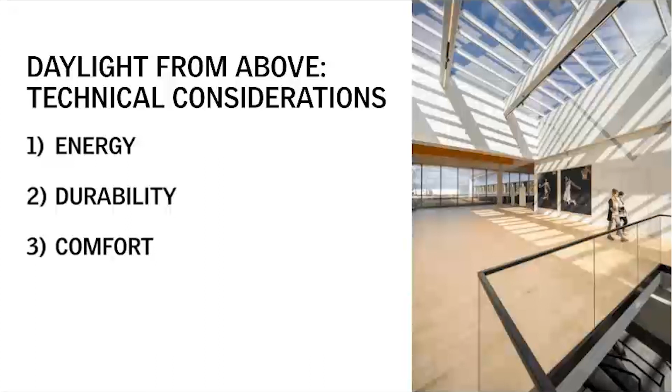We took that into the discussion, and then we talked about durability and really the structure, the building code part of things, but also some of the building science around water infiltration, condensation, and things like that. I've got slides to support that.

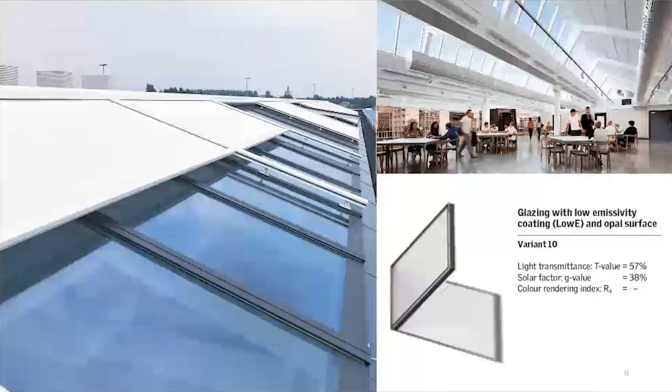And then the third part of the presentation was about comfort. In this part of the conversation, we talked about glare, thermal comfort, and acoustics, and some elements around Active House, which we're going to expand on a little more today. Active House is a European high performance building standard that Velux has been involved with internationally.

So we really took a closer look at that. At that time, before I went into the comfort section, I asked everybody to take their energy blinders off.

I think with energy code or building code so focused on energy, sometimes we forget there are other trade-offs when we look at energy efficiency as a standalone. So that was the idea: take the blinders off and try to get that bigger picture around designing with skylights.

And if that's hard for anybody, it's going to be hard for me, because my background is energy. The first 8 or 9 years of my career focused on energy and high performance buildings. So that was the element we were asking people to consider.

This presentation is available on YouTube. There's a link for it on the RAIC corporate page. If you scroll down far enough, there's a spot where you can look at past presentations.

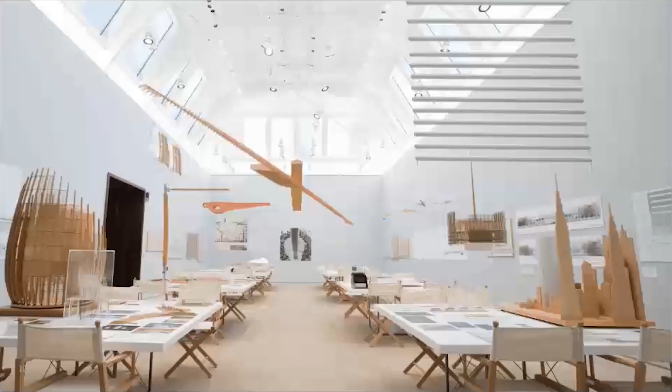Renzo Piano, another really famous architect who loved using daylight in his design, really understood the importance of daylight, and understands that light is probably the most essential material for architecture. It is the least touchable, but probably the most important.

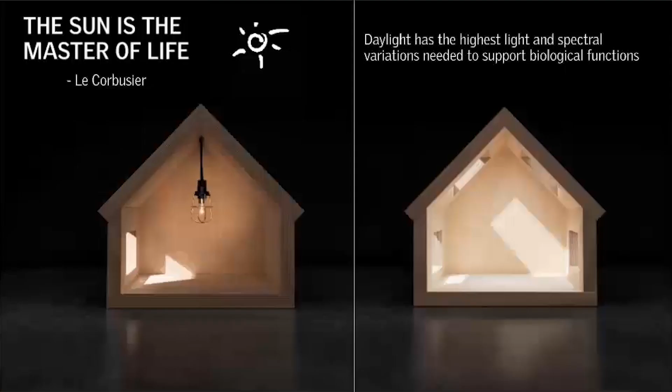It really is certain that our bodies and minds need the sun. Humankind has always had an innate connection to the sun and has relied on its resources for health and flourishing. The sun is the central entity for sustenance on a biological and emotional level.

Light from the sun is fundamentally unique in that it has the highest light and spectral variations needed to support biological functions. Artificial light is simply not a good enough substitute for daylight.

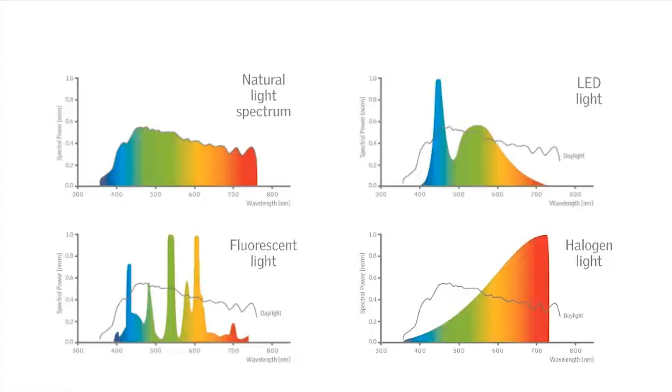Shown here is the intensity of light by wavelength for natural light compared to typical artificial light sources. You see that no artificial light sources are able to mimic daylight's variations in the light spectrum. Also note that only 40% of daylight is visible radiation, while the remaining is infrared and ultraviolet wavelengths.

We need the sun for more than just seeing. The sun's radiation affects our bodies, our minds, our emotional health, and our behavior. The sun's nutrients influence countless factors of human physiology and behavior, which are governed by the circadian rhythm.

That's our 24-hour biological clock. We're genetically bound to these natural rhythms of daylight to guide our body and cellular growth, the secretion of hormones. We need the variations to stimulate the body's biological master clock on a cellular level even. It promotes the processing of proteins.

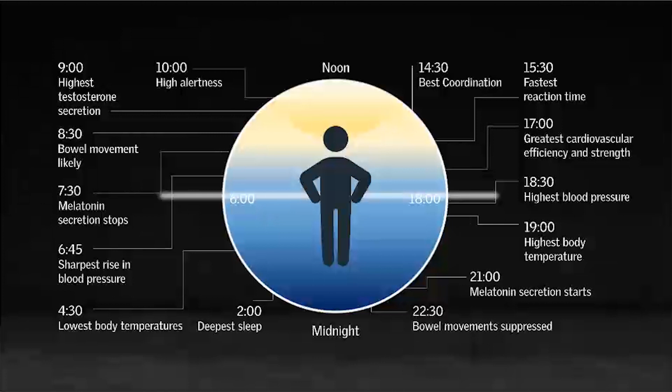The non-visual input of daylight is also needed to synthesize vitamin D into calcium. Even more, it regulates melatonin, which is related to sleep, and cortisol, which is related to stress. So I threw out a whole bunch of things that the sun does, and this really shows that ultimately daylight makes sure that our bodies are well maintained and balanced from day to day.

There have been several studies that have found daylight to improve many things, such as learning and information retention in children. You see that it helps with patient relief and recovery, and you can even see that it helps with productivity in workplaces.

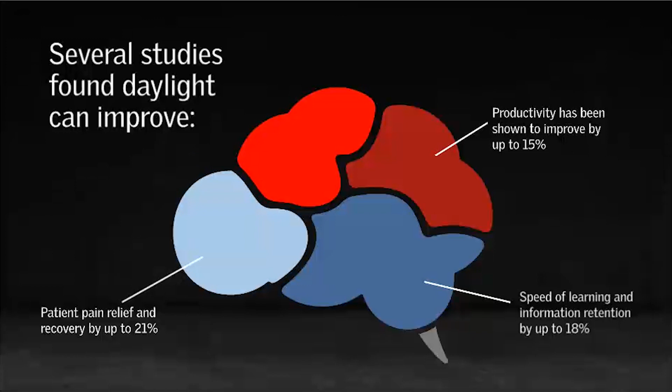So you really are starting to understand that daylight is one of the greatest tools that an architect has when it comes to improving the lives of people and their health and well-being. And there are even more general studies that have shown connections between daylight levels and improvements in children's learning and test scores.

There are higher scores in math and reading, fewer sick and absent days from school compared to those in inadequately daylit classes. There's better concentration, improved vision, better memory retention. Working in classrooms without daylight really does disrupt the basic hormone patterns that help us function well.

We also see the importance in healthcare settings. After food, lighting is the most important environmental input in controlling bodily function. It really affects the body on a hormonal and metabolic rate.

There have been even more studies that have shown that lack of daylight is a major contributor to the shortage of experienced nurses, as insufficient daylight increases their stress. But introducing nurses and doctors to at least 3 hours of daylight per day actually reduces their stress and increases their satisfaction at work.

You see that there's also less medical errors found, and there's just an overall positive influence on health and well-being due to increased visibility, improvement to the circadian rhythm, and psychological effects such as the alleviation of seasonal depression.

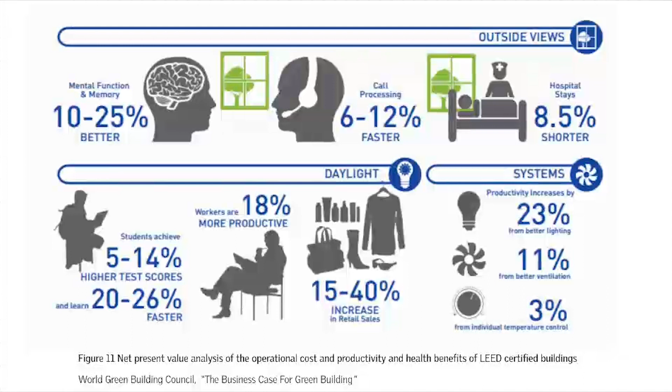The World Green Building Council summarized even more of the benefits here. So if we know that daylight has all of these benefits, how do we get more of it into our buildings? That's really what we touched on in that first presentation.

We're starting to see beyond the strategies and the importance of daylight. Daylight is super unique because daylight is never normal. You have variations in lighting. The daylight will move and change as the sun moves across the sky. There will be changes throughout the day, the month, the year, changes in the intensity, location, and color of the light. Sky conditions and clouds moving will disperse daylight differently and cause it to change. It really enhances psychological comfort, and humans are really drawn naturally to daylight.

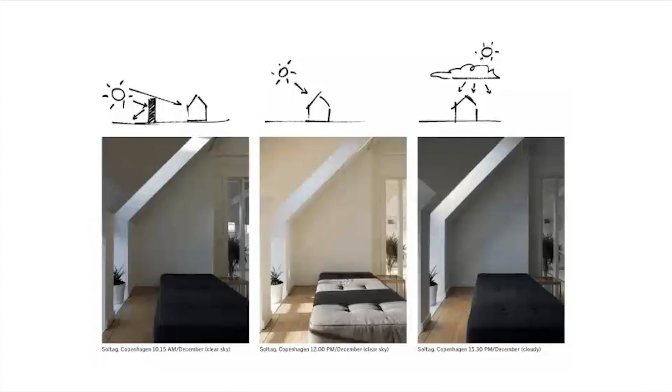We learned that daylight is most powerful from above, that roof windows and skylights have shown to provide up to 2 to 3 times more daylight than facade windows. I mentioned that rule of thumb that we really like to use: the more sky you see, the more daylight you get.

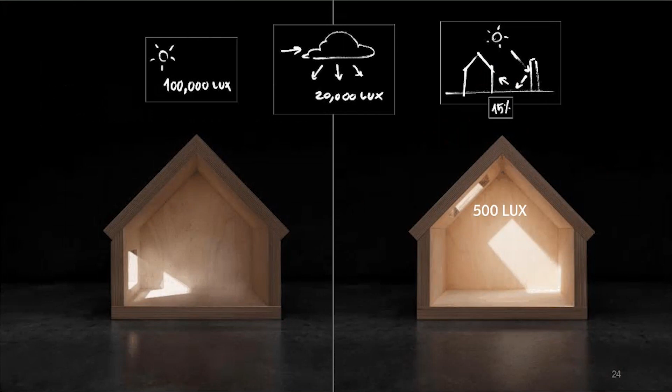We have to remember, the sun is an extremely dynamic light source, so you have this diversity of daylight. You can have direct daylight, indirect, or reflected.

We touched on how there are many factors that affect daylight coming into a building: your sky conditions, your location, your surroundings, if there's any obstruction, orientation, all of these things. And the question that this raises is, how are you going to design your spaces to overcome these challenges now, in light of understanding the importance of daylight for people?

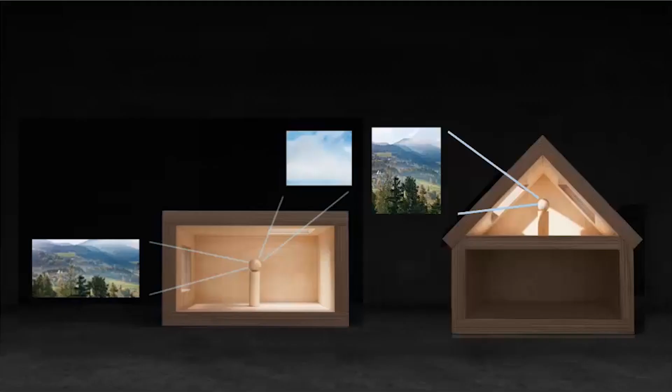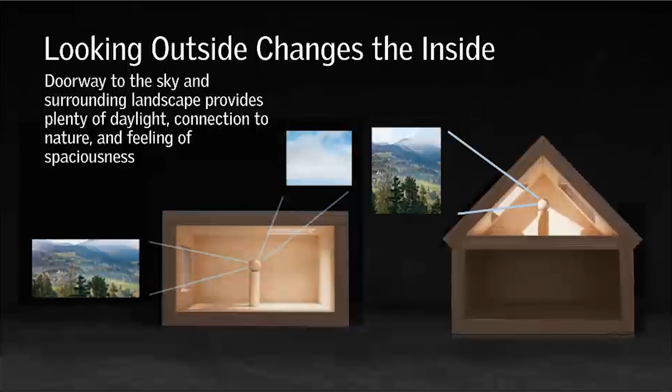There's also this element of view and surroundings, and sometimes it really is about what our eyes are seeing as well. Looking outside really does change the inside. You have this doorway to the sky and the surrounding landscape, and it's going to provide you this abundance of daylight. It's going to give you this connection to nature and this feeling of spaciousness. Even the idea of biophilic design is now coming into play, understanding that innate connection we have with the outdoors. Your exterior views can absolutely transform the essence and expression of the interior of your space.

You have, again, this doorway to the sky. It's going to provide you views to outside, and having both views to the surrounding landscape and the sky is really important. Both are really necessary for psychological and visual comfort. You're having a view with layers—layers of sky, city, landscape, and the ground. You're having this visual variation.

That's really going to help expand that visual experience. It's going to make the space feel bigger and brighter. You're going to experience less eye fatigue because the light is going to be more balanced when coming from multiple sources. Ultimately, you're going to enjoy the space more.

Now, another important part of the conversation of healthy buildings is indoor air quality and natural ventilation. But why is it so important?

Indoor air has been shown to be up to 5 times more polluted than outdoor air. We've become a society that spends 90% of our time indoors. Buildings are more airtight than they've ever been, which is good—it's good at keeping things in, so it's a blessing. You have energy savings, you're keeping heat inside your building, but it can also be a curse in the sense that now we're trapped with all of this pollutant and harmful air within our buildings.

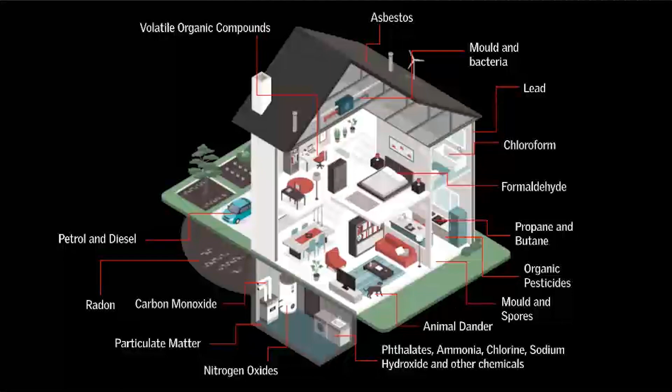This slide was actually taken from a presentation from Sandra Tedesco, who presented at the Active House Symposium. I know that we had mentioned that in one of our earlier presentations that we hosted last September. And these stats really struck me. And who would have thought that burning one scented candle in a home is roughly equivalent to moving every major industrial point source and coal-fired power plant in Texas within 50 miles of your home?

Like, you read that, and the weight of responsibility as an architect, I think, really comes more into play. We understand now that indoor air quality is extremely important when designing spaces that people will essentially spend most of their lives in. So how is health and well-being going to be the driver of our buildings? At Velux, we believe that both daylight and fresh air are key elements to healthy buildings.

And one consideration is the Active House standard. And if you are not familiar with Active House, it looks at 3 main thresholds: comfort, energy, and environment, with a real focus on occupant comfort. So some of the programs and standards that you are familiar with around built energy, some of them may miss this element of comfort. But with Active House, comfort is the primary design driver.

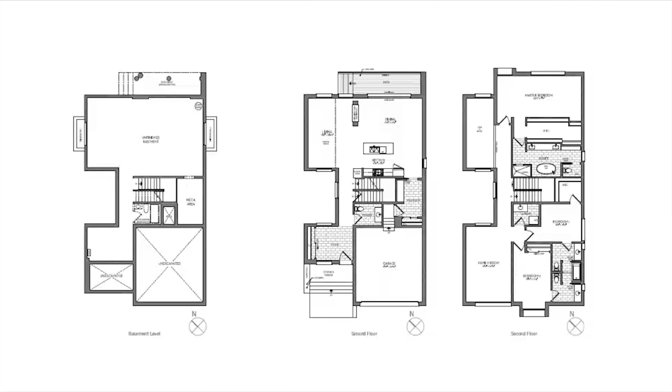Daylight analysis was done on the house. So in the bedrooms and the transportation corridors and spaces like the living room and the dining room, modeling was done. And then on an overcast day, I ran around with my lux meter and took measurements, and ran outside and took measurements, and I was able to validate this model to show that it does have very good daylighting.

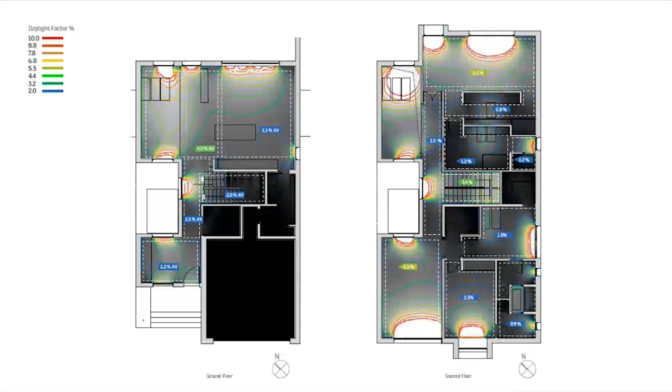We monitored the indoor air quality. So we only monitored the CO2. We measured the humidity and temperature as well, but CO2 is a good indicator of indoor air quality. It's one of the main indicators used in the industry. And typically we set thresholds around 1,000 parts per million. That's what that ppm is.

And this house, it did have an ERV, and it did have venting skylights. So on the left is a bit of a marketing demonstration of the 6 months and how often we exceeded the CO2 thresholds, kind of the high level. On the right is an image where we showed that the levels were getting quite high in the house, and at that point where the chart drops down back below the 800 threshold, that was because we opened up a skylight. And then we left that skylight open to do what the Europeans call an airing.

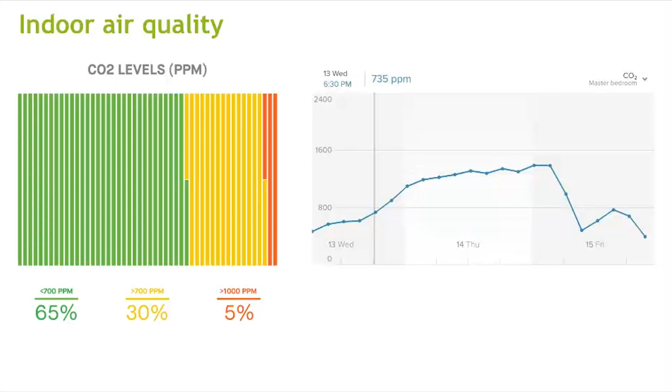I'm getting signs that I have no audio. Everything is unmuted on my side. Monica, are you hearing me? I see in the chat there's no audio. I apologize if some people can hear me. Breaking up a bit. Okay, so some people can hear. I'm going to proceed, and it's not a very long section. I apologize for those who aren't hearing me well. Perhaps my internet is breaking up.

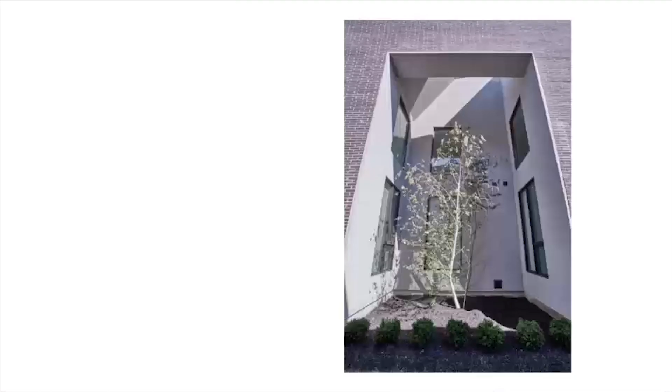Okay, let's move forward. This is that same space, and if you look through those tall windows, you can see that river birch tree I spoke of. And like I said, on the ground floor and the upper floor, you could see that tree from just about every room. There's the tree there, and there's that space. Okay, I'm not sure why that image isn't arriving.

Okay, the master suite even had some skylights, and I joke often that in this space I gave a 20-minute lighting lecture to my sales team from across Canada, and we played around. We closed the blinds on the skylights, we closed the lights and opened the lights, and we closed and opened the blind, and we compared the light from above, from the side window, and from the electric lighting to look at the color, to see the spread of the light, the evenness of the light. It was probably one of the most effective daylighting presentations I've given, and it was in what ended up becoming my bathroom.

Image is not loading on my side. I'm just going to click forward. Oh, there's, I guess, some animations.

And I know that superkül has that written on a little post-it note. A couple of the people in the office have that in their office. So it's pretty neat. From the mouth of babes, she really captured it. And she's also the one in our family that said it's like living outside, living in this house. So it was a really nice experience.

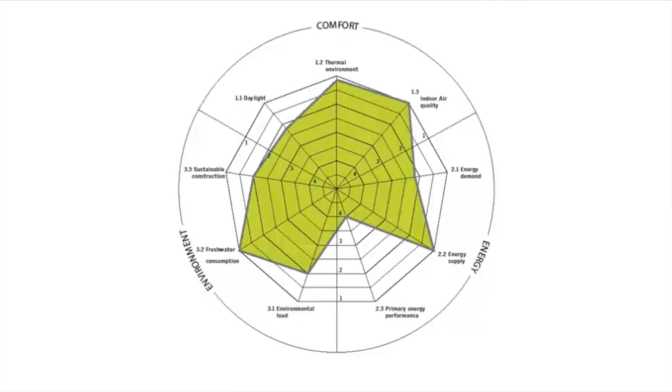Thank you, Russell. I really do actually like that last point with Robert Bean. Design for people and good buildings will follow.

So hopefully everyone can hear me. I'm going to push through, and hopefully if you are having any issues with audio, you can resolve it.

So we looked at live, and now we're on to learn. So some of these projects have names that will be very difficult for me to pronounce, so I apologize right off the bat. So this is the Wolfurt Primary School. So this is a primary school and nursery in Austria. And this began with a project competition in 2015 that was settled by the municipality. This architecture firm, which is also very difficult for me to pronounce, got the first prize and was fully realized in 2018.

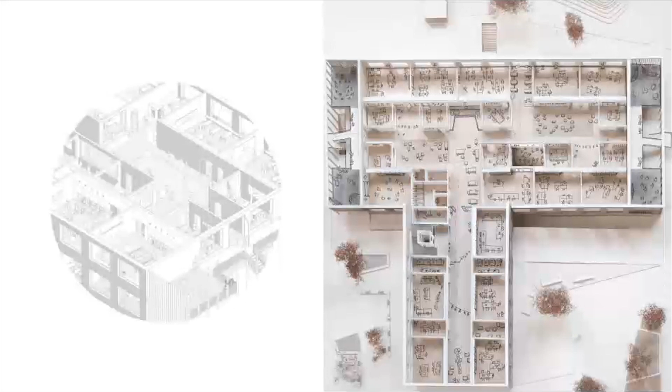So the architect describes the design as the school as a path and square. It is a compact form of sustainable timber construction with fluid transitions and pathways that are really inviting children, staff, and parents to enjoy the surrounding context of greenery in the village. The floor plan interlocks vertically and horizontally to reduce as much as possible the walls and barriers. And the school was really designed as a spatial continuum, as the architect would put it, that carefully orchestrates these intimate places of quiet and retreat and courtyards that allowed for greater socialization and interaction.

So it was really important that the design created an open learning environment. The plan incorporates many diverse functions. So you have the kindergarten, the primary, the gym, the event venue, and each has clearly defined spaces that interact with each other through barriers of glazing rather than solid or opaque walls. You have these communal areas that are generated as required within each zone, and you actually are getting rid of these unnecessary hallways and corridors. So essentially reducing spaces in the floor plan that were primarily meant for circulation allows for every space to be functional and foster more meaningful interaction and communication.

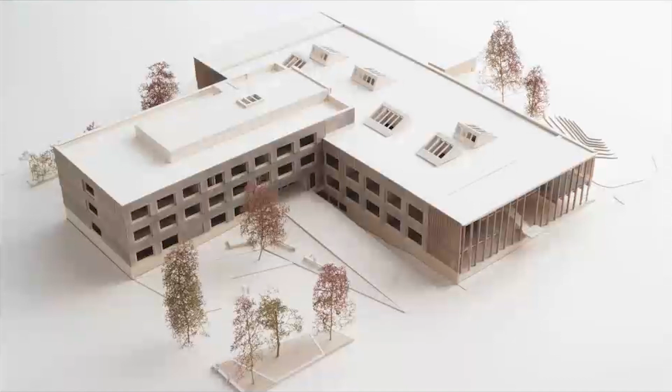The architects really wanted to cultivate a cozy and warm atmosphere that integrated local craft and materials. So not only in the timber construction of the structure of the main building, but also using oak for floors and furniture, using wood ceiling for acoustics, and creating a healthy indoor environment. And a huge element to cultivating such an open and welcoming environment was having daylight flood the school grounds on every level. So the design is quite generous with the skylights and glazing.

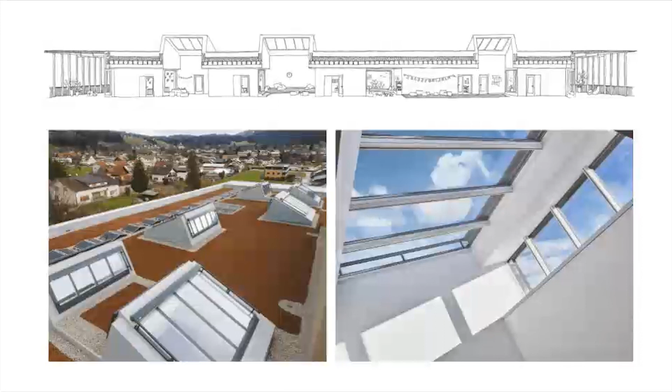They utilize north lights, which are skylights positioned to the north, and that's going to reduce glare. The skylights are allowing light to enter from both directions of the light shaft, which is going to give a really nice and even light in the space, as opposed to having a harsh light that is coming from one direction that will increase your perception of contrast, right? We're starting to bring some of these principles that we learned in the first presentation and understanding how it applies to us on a human level here. So we even see that the light shafts are really spacious and open, and they're designed to reduce shadow and contrast and act as a well of light that softly illuminates each space below.

There's also these central atriums and courtyards that serve two really main purposes. So the first is daylight. You're really creating opportunities for light to penetrate into the central and core parts of the plan. So they allowed for borrowing daylight between the spaces. They're grabbing daylight from as many directions as possible. And this is especially going to help with spaces on the lower levels, which are farther from the skylights, and spaces that are more in the core that are farther from facade windows as well.

And the other purpose is to really create this sense of community. They're encouraging community and interaction between each of the programmatic areas of the space. So you're getting to see what others are doing. And it creates a really playful and open environment. And it's really perfect for little ones that are learning and exploring and really wanting to socialize with other children.

The overarching driver for the design of the school was to design a space that was healthy and would foster a learning environment that would allow for better concentration. And we mentioned this earlier, that there are studies that show the connection between daylight and productivity and better concentration and even learning and memory retention, especially in children.

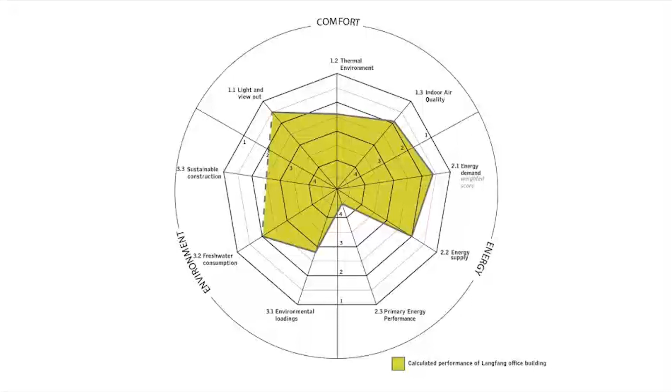So in addition to thermal comfort and low energy applications, the design strategies included natural full spectrum daylighting and clean, fresh air. So the designers of Velux AS Building Industry Division saw a really great opportunity to create a new headquarters that would optimize comfort and productivity of its management, marketing, sales, and technical staff. So each department had its own needs in regards to daylight, acoustic, privacy, and electrical for certain equipment. And there were about 10 departments that they had to oversee in this design.

So a really well-informed design required the collaborative process that included various consultants and stakeholders to really yield super detailed studies on energy use, airflow, and task-appropriate daylight factors. So the input of multiple disciplines was really necessary to develop a comfortable workplace that requires minimal energy use. So the way they described it was understanding how the human organism works. You need the collaboration of many parts to create a good indoor climate and make sure that everything is balanced and well regulated.

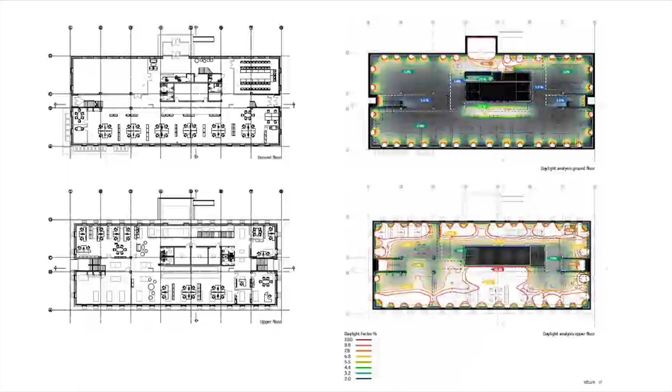So for non-reading tasks on the ground floor, 2% is sufficient and considered well daylit. So that works really well with the program, and that it's a fitness center, recreational space. And then on the second floor, it's showing much higher daylight factor. So virtually the whole floor is sufficiently daylit and accommodates well for the work and tasks needed without having to turn on artificial light.

And visitors are immediately impressed by the amount of natural daylight that comes in through the arrays of roof windows and skylights. You have these sloped white walls that dramatically increase the reflection of light in the interior, and that's going to help diminish the need for artificial light.

The compact mass is centered around an open double height atrium, and the trapezoidal volume is a much more dynamic volume and appearance, and this also allows for better inflow of light through the roof windows. It is also going to help the effectiveness of the operable skylights on the flat roof that are programmed to open and close at certain times to optimize indoor air quality and temperature.

This is really going to help keep the space cool in the hot and humid summer months. So you can start to see how energy efficiency is coming into play, and you're even starting to read some of those stats that are presented in the center. The building is continuing to provide more and more insight as it is being measured and continually modified for greater energy efficiency.

There are many challenges to design such a collaborative building system. Langfang climate is cold and dry, and it's a tough climate to achieve low energy consumption. This building being an office space means that internal heat gain plays a major role in defining the heating and cooling loads. So it's really important to the occupants' comfort in this particular project is TABS, the thermally active building system.

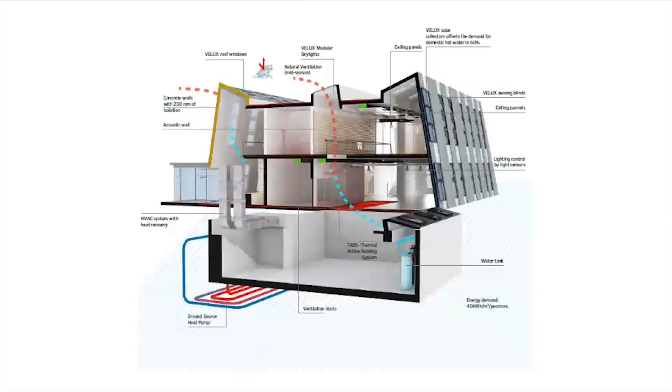This was designed to deliver radiant heating and cooling. You have this embedded network of water pipes in the mid-plane of all the concrete slabs, and it works in conjunction with the operable skylights to encourage stack effect and natural ventilation. All of this in turn requires a smaller air handling unit to achieve optimal human comfort.

There were many other decisions as well that were made to enhance the overall healthy and sustainable design strategies. So steps were taken to choose really sustainable materials that would help improve acoustics and minimize VOCs and improve indoor air quality. And then you have sub-metering to accurately monitor energy use and consumption.

You have CO2-based control systems that respond based on the feedback it is given. And you have solar heat gain through the windows and skylights in winter. You also have exterior and interior shading devices that are going to help minimize the solar heat gain in the summer, as well as control glare and offer soft and diffuse light.

In the age of globalization and expanding construction market in China, this dynamic economic environment meant that Velux had to give extra attention to the well-being of its Chinese employees to sustain innovation and competitiveness. They really wanted to foster a sense of camaraderie and belonging amongst the staff.

So they have the fitness center, indoor games such as table tennis, and organize outdoor recreational activities and sports, and most significantly, they have the vegetable garden, which they call the Happy Farm. The CEO, Christian Olsen, mentioned that many of the employees would finish their lunch really quickly and then spend the rest of their break tending the gardens and collecting the week's harvest every Friday of produce. Some examples are corn and potatoes.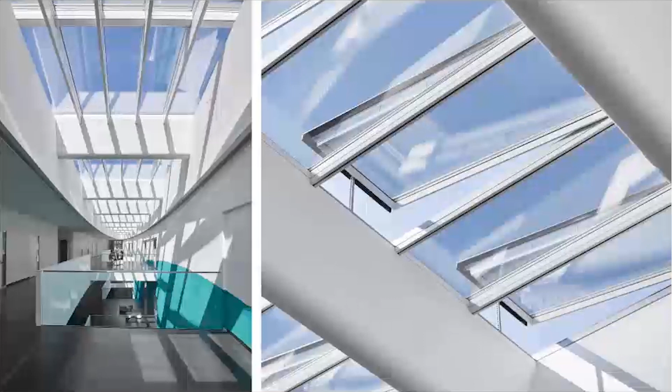The laboratory building also features an incredible oval-shaped glass opening over the central atrium, and this expresses itself really as a signature feature of the building. The skylights have a very visual presence—these are our Velux Modular Skylights, which we will be talking about in the next presentation next week.

This really enhances the concept of reflecting and emphasizing the natural surroundings, providing daylight to the lower levels as well as fresh air and active cooling through the venting units. All in all, the result is this inspiring design that floods the building with daylight and fresh air, making the individual workspaces as well as communal areas enjoyable, beautiful, and refreshing to both employees and patients.

For the last project, thought we could take a little route to explore and have some fun with this. So this is the Green Solution House by 3XN, in Bornholm, Denmark. This is an experimental hotel and conference center. It is a certified active house that the Velux team in Denmark was a part of and collaborated a lot on this project.

Located on the Danish island of Bornholm, a popular travel destination, they had a clear vision of becoming one of Europe's most ambitious communities within sustainable living. The Green Solution House is a key element to make this vision a reality.

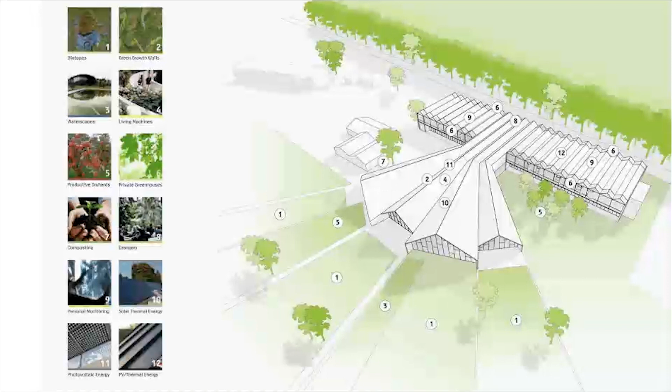So they don't want to just reduce harm. They actually want to be a restorative force in the community and environment through their architecture.

So looking at the plan, the hotel rooms are situated towards the northwest in the site plan and office buildings towards the southeast, and then opposite the main entrance are the conference rooms and eating areas that look out into the surrounding landscape.

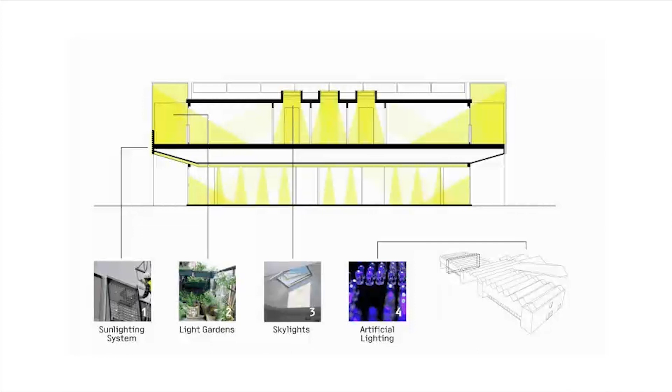There was a strong focus on daylight-driven design, which was key to creating really well-lit spaces throughout the building. Parts of the roof are retrofitted with a lightweight steel structure and glass panels that allow daylight to penetrate deep into the space. Sun tunnels bring light into areas where daylight is limited, and skylights are used in all the common areas and hallways.

I had mentioned that we were using the Velux Modular Skylights in that previous project, and it's also being used here. The ridge light atrium system actually informs the form of the roof over most of the building plan, giving the building its distinct appearance. They have integrated PV panels—if you look closely you can see them on the right hand—and that creates a really interesting daylight pattern inside, used primarily for the energy and sustainable features in the building.

Comfort was absolutely an important concept of this project, as it is one of the three major thresholds of the active house principle. Daylight was extremely important to contribute to the comfort of occupants, for both workers and visitors. Thermal balance, or thermal comfort, ensured occupants always had a satisfactory indoor temperature, and clean air was also essential to optimize the quality of the indoor environment.

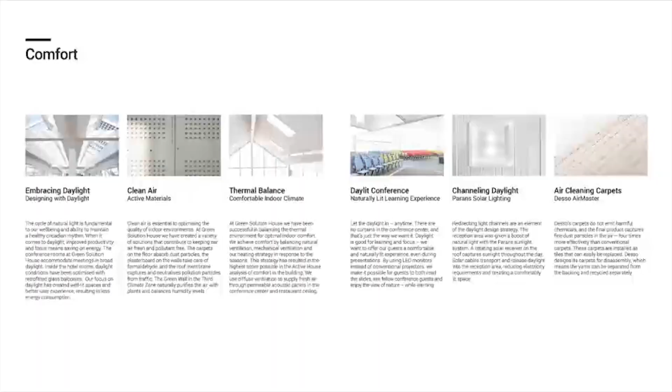Material choice was another important element to ensure good occupant comfort and health. Carpets on the floor absorb dust particles, plasterboard on walls takes care of formaldehyde, the roof membrane captures and neutralizes pollution from traffic, and the green wall you see in this image naturally purifies air with plants and balances humidity levels.

Achieving optimal thermal comfort involved balancing natural ventilation, mechanical ventilation, and heating strategies. A diffuse ventilation strategy supplies fresh air through the permeable acoustic panels in the conference center, as well as the restaurant ceiling, which also acts as radiative cooling. In-floor heating and cooling are also supported by on-site thermal energy storage systems.

The desire for buildings to inform and influence behavior was also a really important element in this project. So they designed these smart rooms using an app that was developed so people can learn how to control their indoor environment for themselves. It measures energy, light, air, and water, making it personal for the guests—you're able to relate your experience in the hotel room with the quality of air and daylight levels. The hope is that guests would take these learning principles and apply them in their own home.

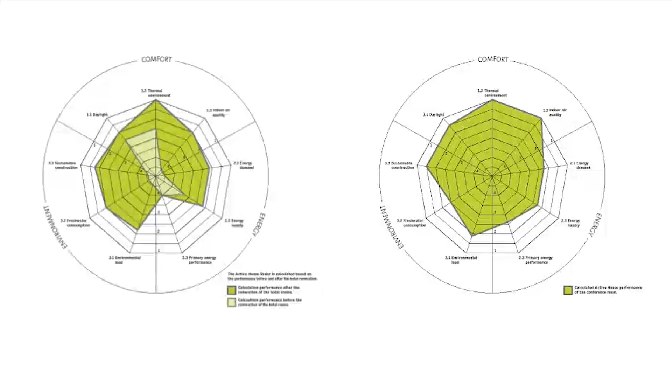We touched on comfort, one of the three thresholds of the active house concept. The other two were energy and environment. Energy has been measured throughout occupancy, and there's an interactive energy visualization in the lobby that tracks these energy footprints and correlates them to the carbon and resource impact. They really did a lot to ensure they were making ethical choices, which was a big part of the vision and really enhances the active house concept as well.

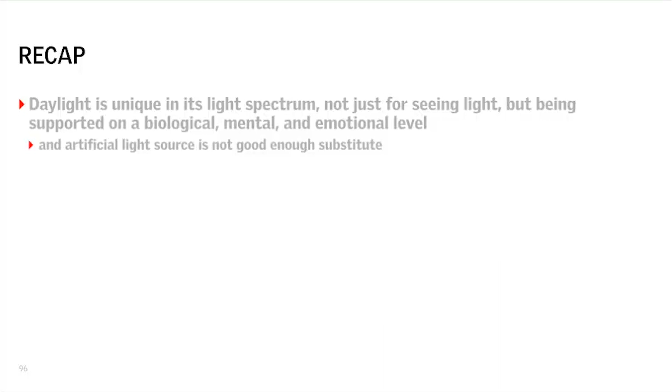I wanted to end with this quick recap, because there's a lot of information that was shared, but I want to make sure you take home some really important elements from the presentation. First, daylight is unique in its light spectrum, not just for seeing, but for supporting us on a biological, mental, and emotional level. Artificial light is not a good enough substitute.

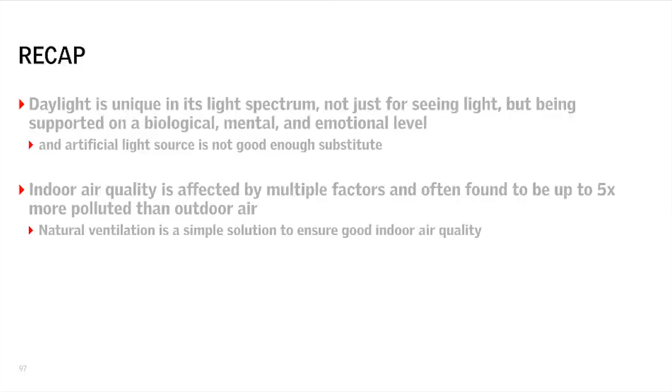Indoor air quality is affected by multiple factors and is often found to be up to 5 times more polluted than outdoor air. Natural ventilation is a simple solution to ensure good indoor air quality. A healthy indoor climate that benefits humans' well-being is achievable while still maintaining strong sustainability and energy practices, which means that you can do it too.